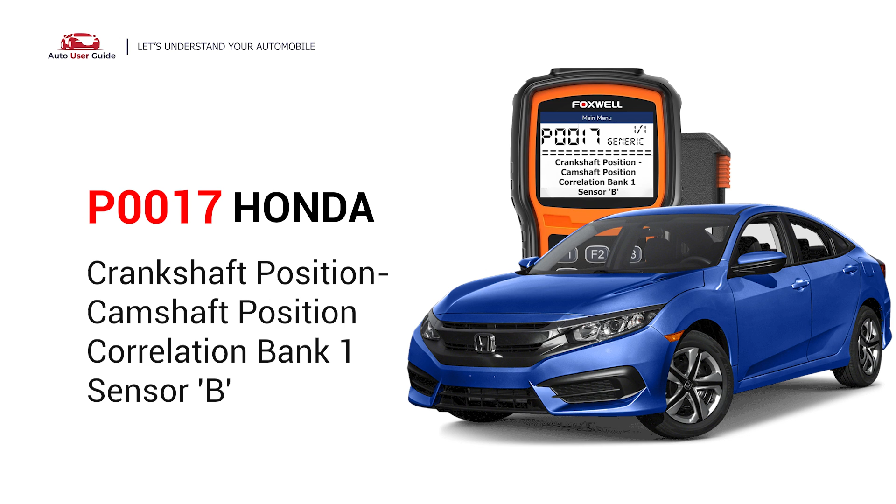This repair video for the P0017 error code is specifically tailored for Honda drivers. If your Honda is showing a P0017 code, this is for you. It indicates that the camshaft position sensor B for bank 1 does not correlate to the signal from the crankshaft position sensor. Under this circumstance, stop driving and repair your vehicle immediately.

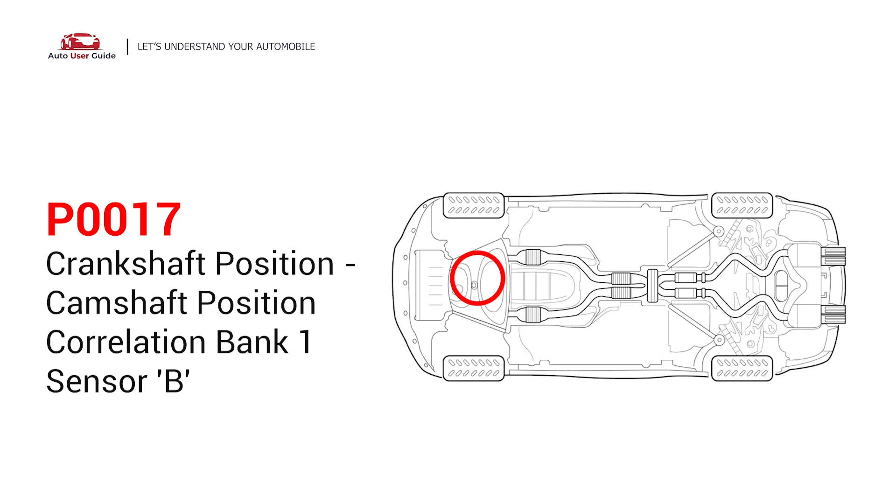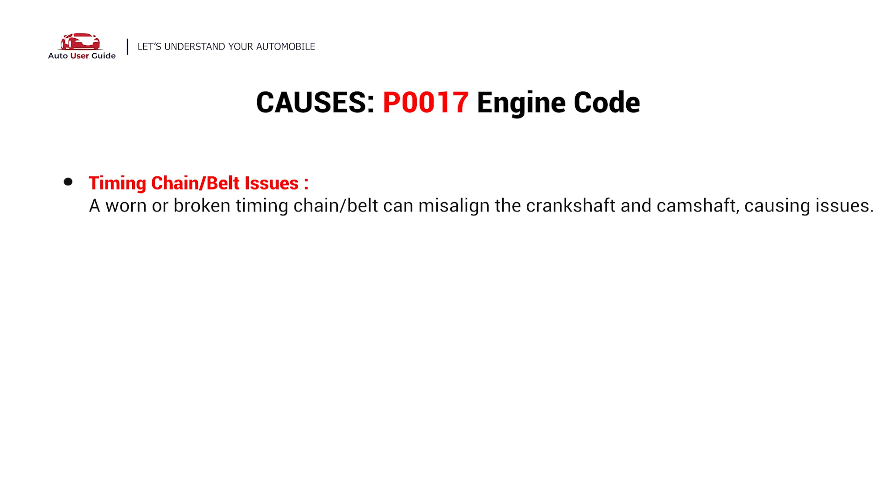So what causes this imbalance? Here are the most common culprits. This error could be caused by these possible faults in your car: timing chain belt issues, sensor problems, low oil pressure, or VVT system malfunction.

Here are 4 simple DIY methods you can try to solve this problem. Method A, oil change.

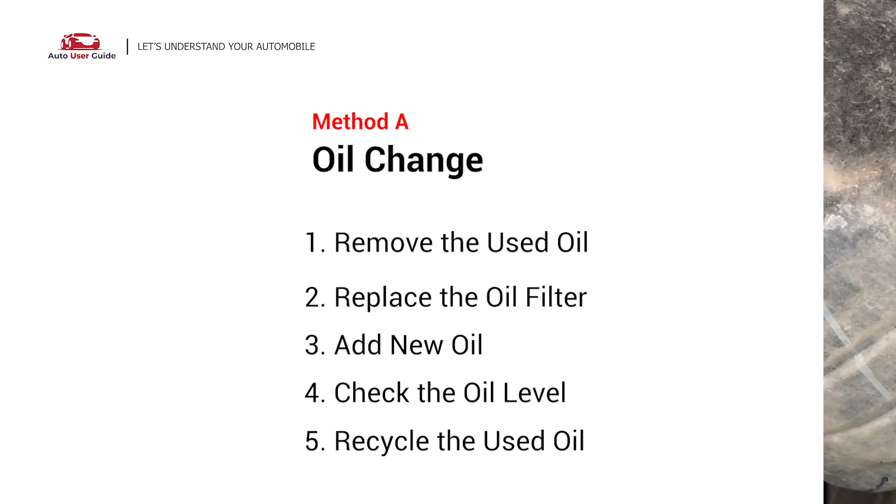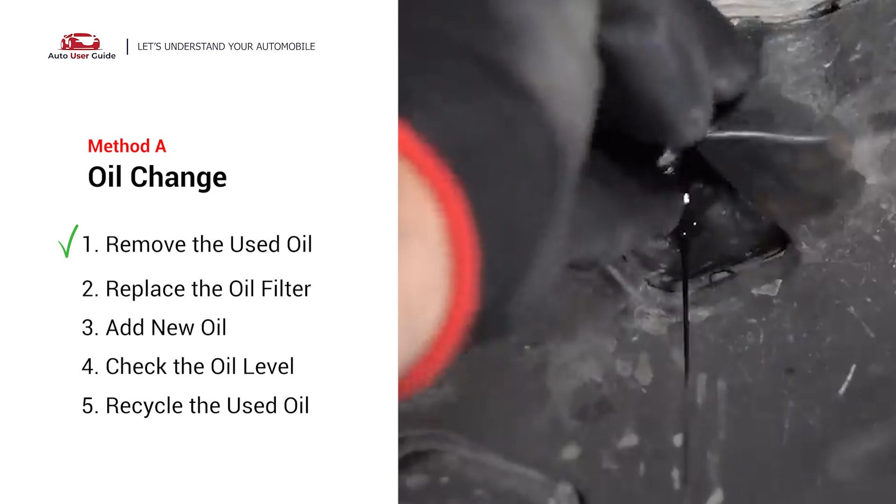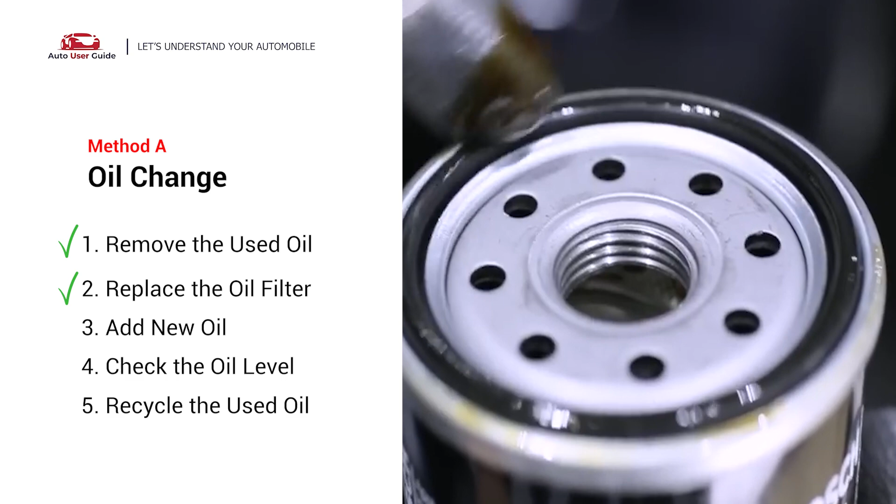Locate the oil drain plug on your vehicle and place an oil collection pan underneath it. Loosen the nut. Drain the engine oil. When the flow of the oil gets slower, use the oil filter wrench to loosen the oil filter. Apply some seal on the new oil filter. Now tighten the filter in its place. Then retighten the nut.

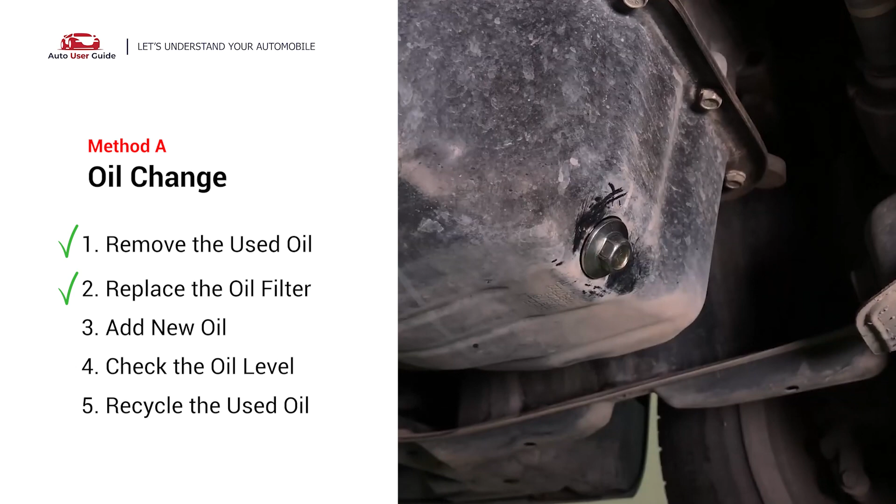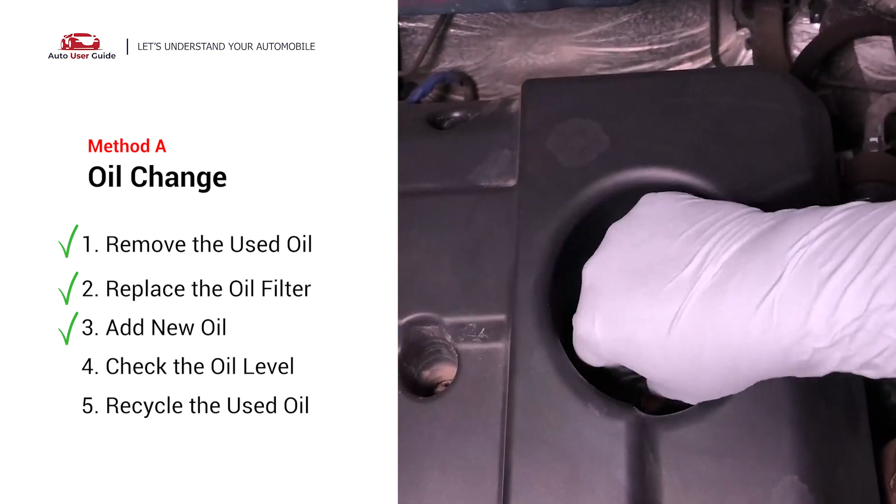To fill the vehicle with fresh oil, first locate your oil fill cap at the top of the engine. Clean the cap before removing it. Take the cap off and place the funnel into the opening. Add the amount of oil specified for your vehicle, then replace the cap.

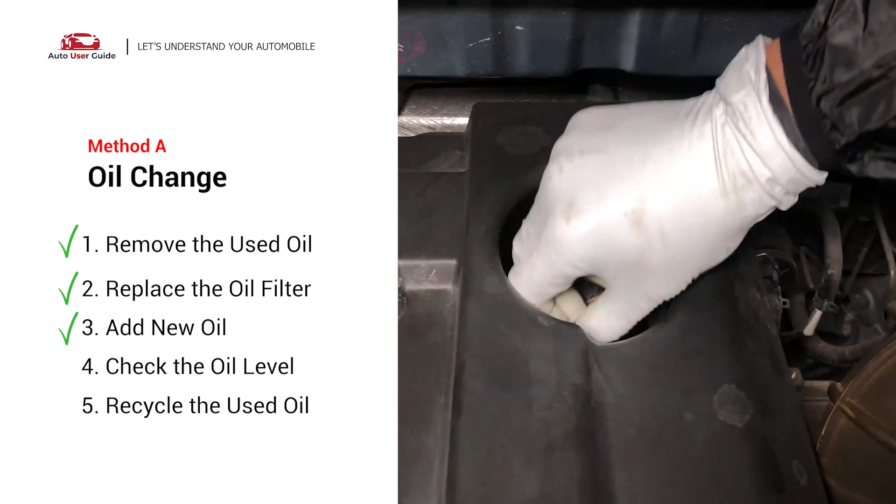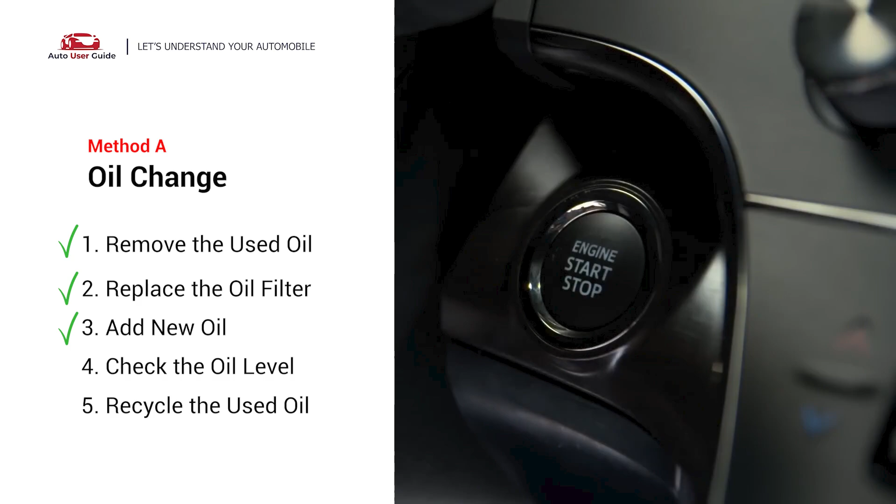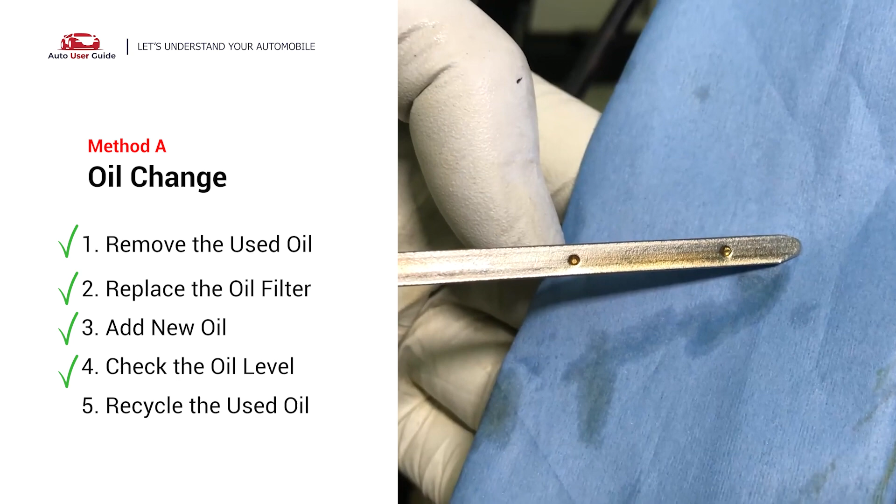After the oil change, start the engine and let it run for a minute to bring your oil pressure up, and recheck your oil level. To check oil levels, pull the dipstick out and clean it off. Replace the dipstick and pull it out again. The oil should be near the top dot or fill line. If it is close to the lower dot, you'll need to add more oil.

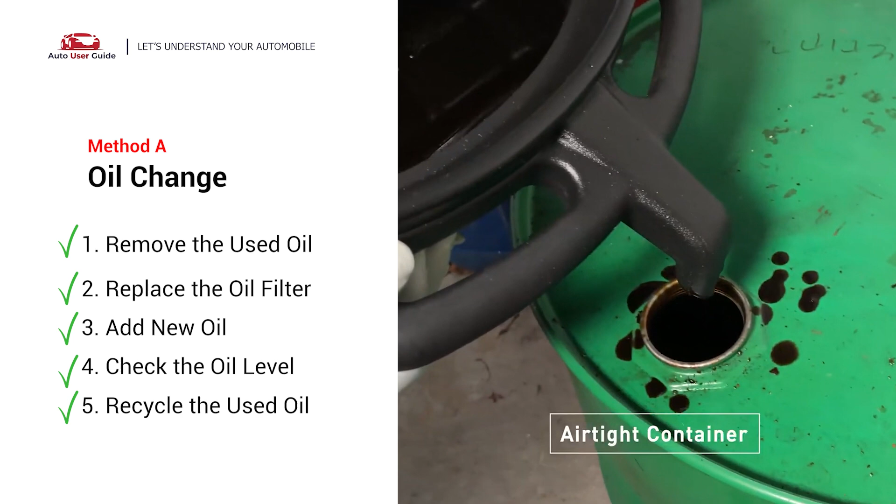Place the used oil from your collection pan into an airtight container with a screw-on cap. Make sure the oil is cool before transferring it to the container. Used motor oil can be recycled at most auto stores or at recycling centers.

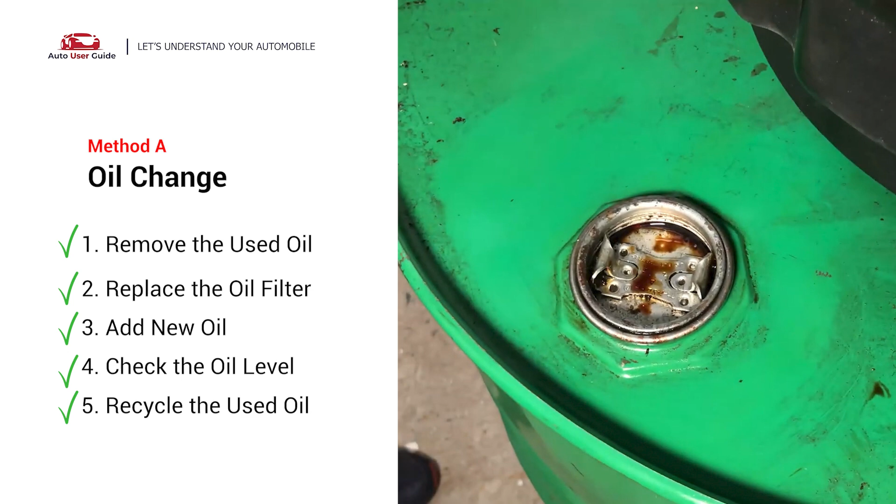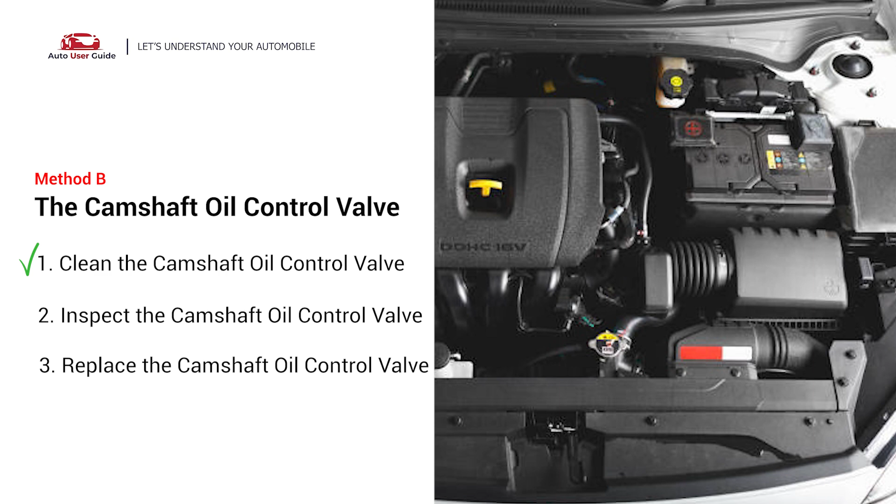Method B, the camshaft oil control valve. The camshaft oil control valves are typically found in vehicles equipped with variable valve timing systems. To begin, carefully remove the camshaft oil control valve from the engine. Next, clean the valve thoroughly using a specialized valve cleaner.

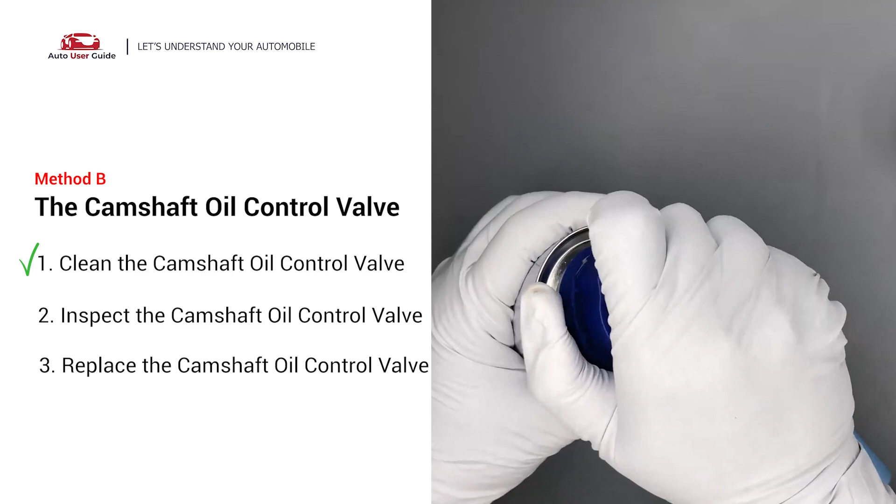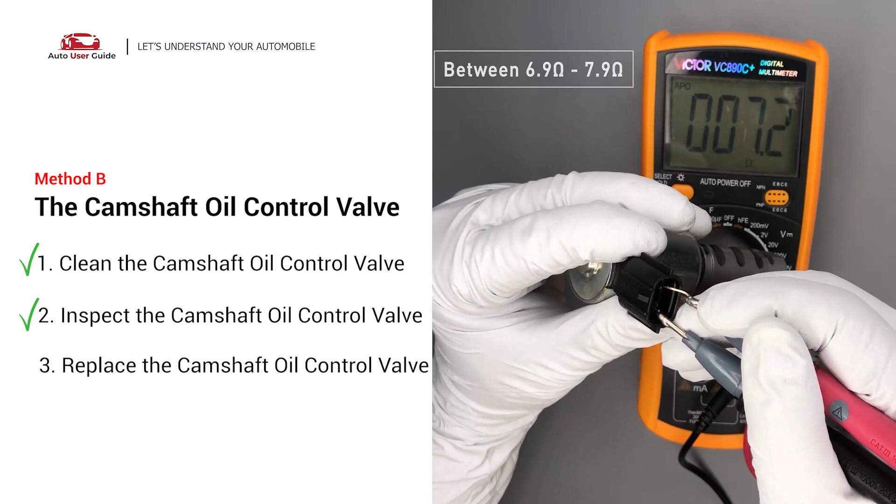After cleaning, use a multimeter to test the camshaft oil control valve. At an ambient temperature of 68 degrees Fahrenheit, the expected resistance should range between 6.9 ohms and 7.9 ohms. If no reading is detected, this indicates that the camshaft oil control valve is defective and needs to be replaced.

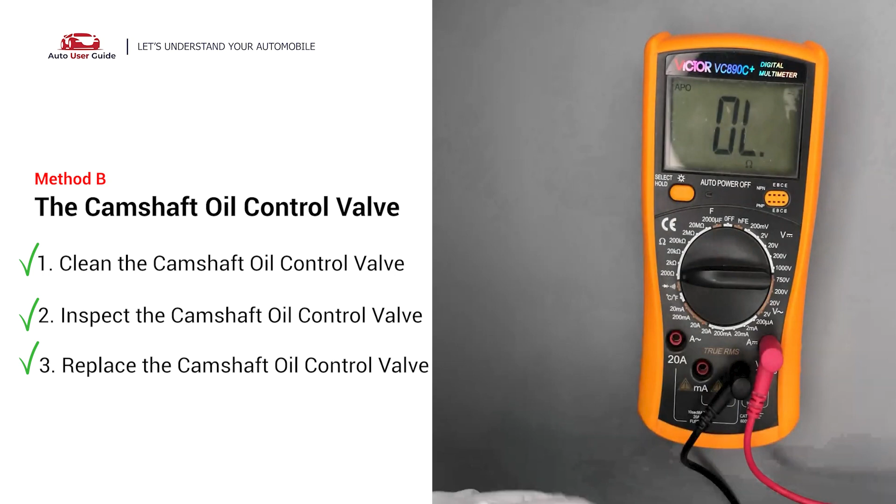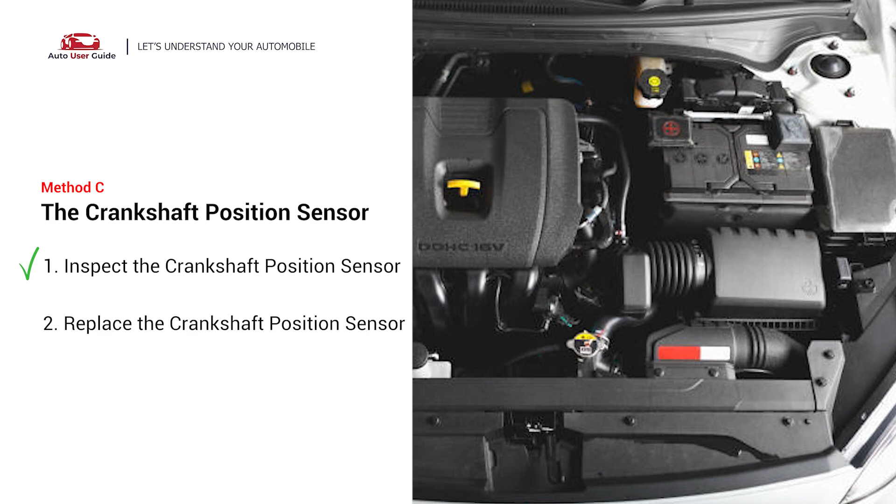Method C, the crankshaft position sensor. The crankshaft is typically located at the front underside of the engine, often mounted to the timing cover. Start by carefully removing the crankshaft position sensor from the vehicle. Inspect it visually to ensure it hasn't been affected by leaks from other engine components.

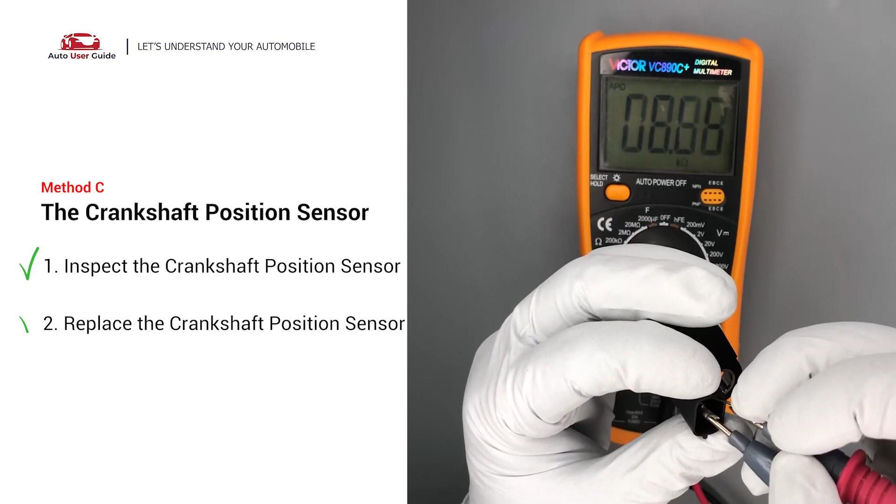Next, use a multimeter to perform a resistance test on the sensor. If there is no reading, this indicates the sensor is defective and requires replacement. Additionally, check that the O-ring from the sensor hasn't fallen into its mounting hole. Finally, install a new crankshaft position sensor in its place.

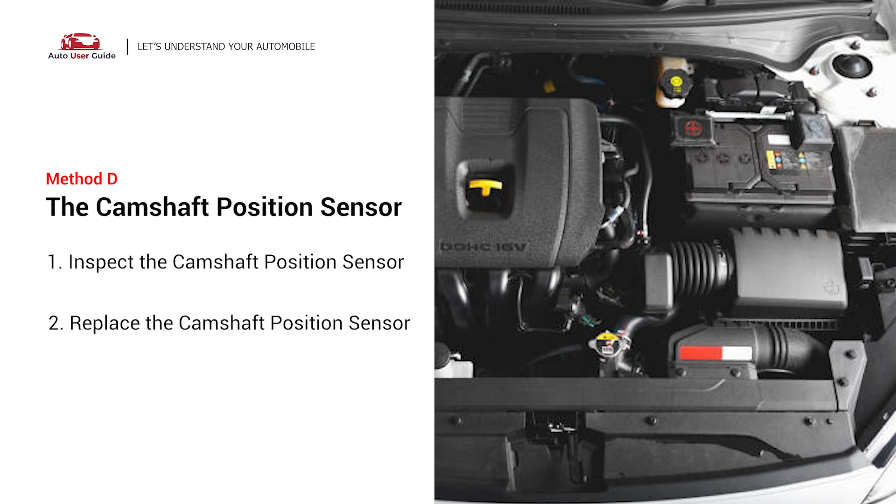Method D, the camshaft position sensor. The camshaft position sensor is typically located in the valve cover near the top of the engine, or it may be positioned at the front or rear of the cylinder head.

Begin by carefully removing the camshaft position sensor from the vehicle. Inspect it visually to ensure it hasn't been contaminated by leaks from other engine components. Next, use a multimeter to test the sensor. If no reading is detected, this indicates a faulty sensor that requires replacement. Also check if the sensor's O-ring has fallen into its mounting hole before installing a new camshaft position sensor.

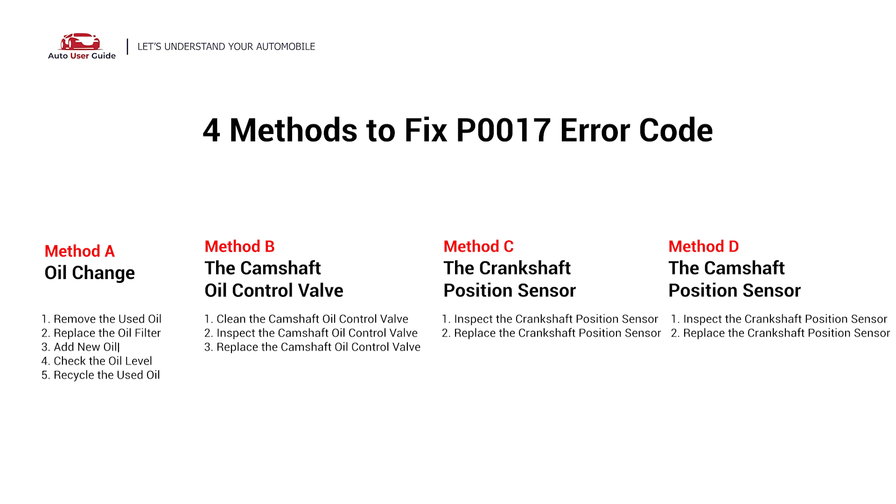So here are 4 of the most practical solutions to fix the P0017 engine code. P0017 is a common issue among the following makes: Chevrolet, GMC, Cadillac, Buick, and Mercedes-Benz.